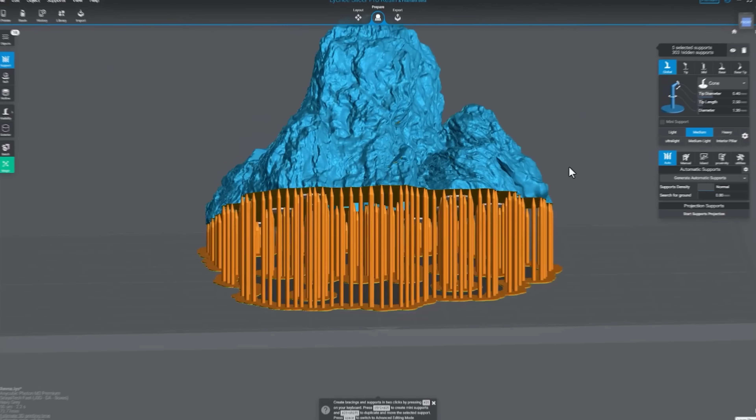Folks, imagine turning a simple idea into a fully 3D printable model without juggling apps, fixing messy geometry, or learning complex software. Sounds unreal, right? Today we're looking at a tool that actually makes this possible.

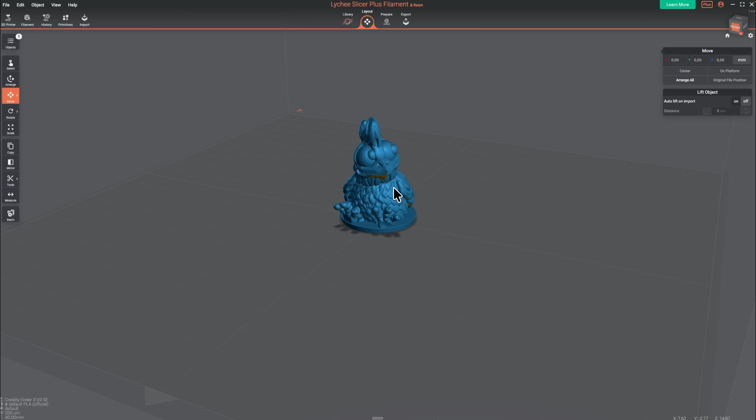And perhaps the biggest advantage is that everything happens inside the same ecosystem. You generate the figure, inspect it, and slice it directly in the Lychee environment. No exporting, no file conversion, no extra steps. For anyone who prints regularly, this alone is enough to speed up your workflow dramatically.

Alright folks, now that you know why this tool matters, let's walk through the full process together. Here we are inside the tool. On the main page, everything starts with the prompt field. This is where you describe the model you want to create.

Let's try generating a chess knight figurine standing on a base suitable for 3D printing. Before generating, we can choose a style. Lychee Gen already offers several presets, like Halloween base or tabletop no base, and more styles are on the way. If we try to create without picking one, the platform shows a warning recommending that we choose a style for better predictability and quality. But for this demo, let's continue without one.

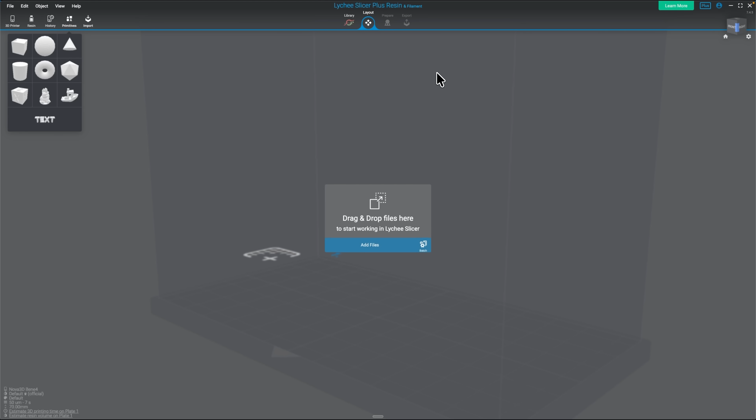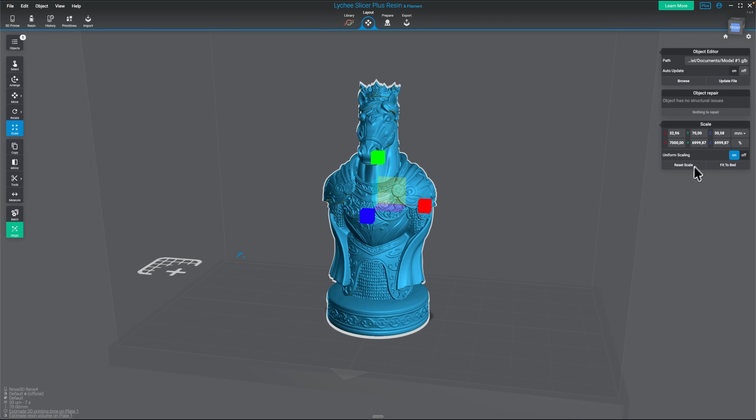Now let's move to slicing. In the same ecosystem, we click to open the Lychee slicer. The figure transfers automatically, we don't have to export anything manually. Inside the slicer, we can see the size, scale, and position of our figurine. On the left, we have tools to rotate, mirror, cut, or scale the model exactly the way we need. Our prototype is already positioned correctly, but if it weren't, we could rotate it just by dragging. And if we want it bigger or smaller, scaling reacts instantly.

Next, let's choose a printer. For this figure, I'll choose a Nova3D Bene4 with a resin setup that works really well for this kind of figurine and printing style. Here you can tweak the resin parameters, check the device history, or load additional objects if you need to.

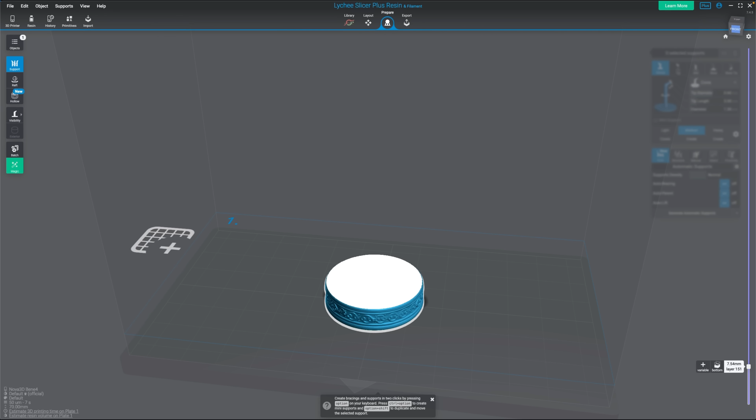Now we click Prepare. The slicer starts converting our 3D model into step-by-step instructions for the machine. Imagine slicing a loaf of bread, each slice represents one layer that the printer will build during the process. You can scroll through these layers using the slider to preview how the figure will take shape from the bottom to the top. And because the mesh is watertight, there are no gaps, artifacts, or weird empty pockets that would usually cause problems during printing.

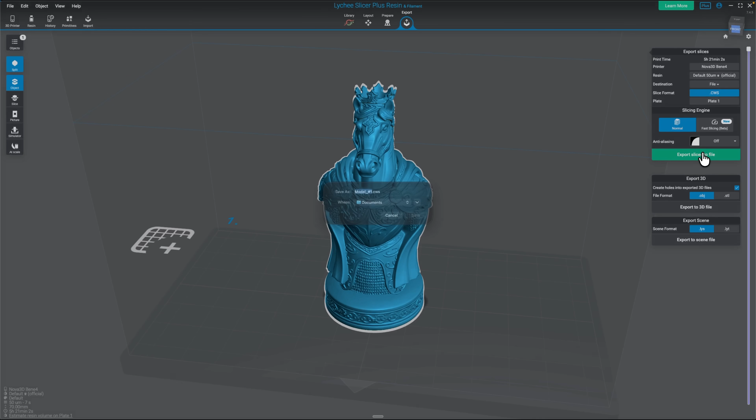After slicing, Lychee generates a print file, the language your hardware understands. It tells the machine where to move, how to build each layer, and which settings to use. From here, we just send the file to the printer and start the job.

And the new auto support system is honestly a huge step up. The supports are clean and smart, and they save you a ton of time compared to manual workflows. You spend less time tweaking supports and more time actually printing.

So you create your concept in Lychee, the tool takes care of the technical, print-ready side, and you focus on the artistic side of your work. That's exactly where this tool should be moving, handling the technical printing steps, so creators can stay in their creative flow.

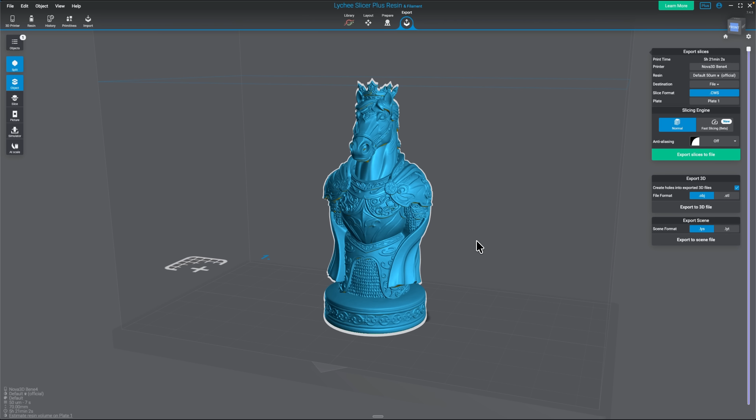Now, while we're here, let's talk about what makes this tool different from other AI 3D generators out there. A lot of AI systems can produce 3D objects, but most of them create meshes that are full of holes, overlapping geometry, or completely unusable artifacts. You often need Blender or Meshmixer to clean everything manually. Lychee Gen avoids all of that. The watertight topology alone sets it apart, because it means you can go straight to printing without suffering through cleanup.

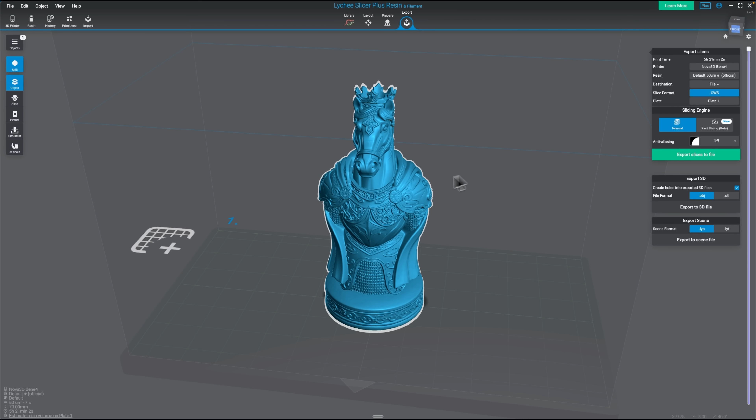Another major advantage is speed. While heavy prompts can take a bit longer, the results are consistent. You don't get wildly different shapes each time. And since the tool is integrated with the slicer, everything happens in one place.

On top of that, Lychee Gen uses a credit system with 4 different packs. So you just pick the option that fits how often you create, whether you're testing a few ideas a month or generating new models all the time.

Plus, the Lychee team is already working on updates that will allow artists and sculptors to use Lychee Gen like a true assistant. The AI will be able to generate the technical base, letting creators focus entirely on the artistic side of the sculpt. That's a huge shift. It means you can experiment faster, prototype designs, and bring ideas to life without wrestling with tools that slow you down.

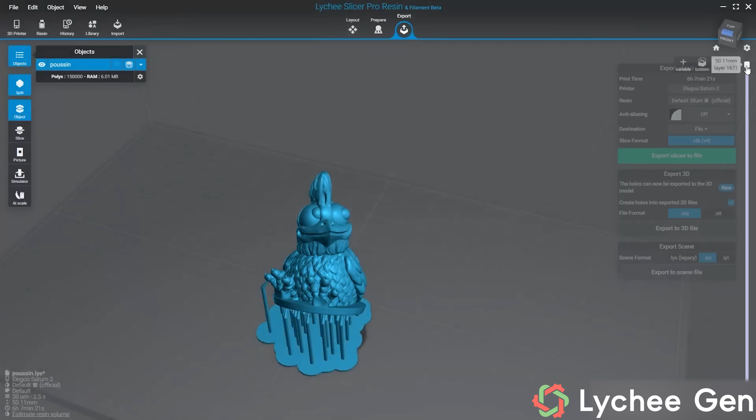Alright, let's wrap this up. Lychee Gen isn't just another AI toy, it's a practical tool that genuinely changes the workflow for 3D creators. Whether you're printing miniatures or simply exploring the world of modeling, this platform gives you the power to go from idea to print in minutes. The fact that everything stays inside a single ecosystem makes the whole process smoother, faster, and honestly more enjoyable. And with more updates already on the way, the potential here is only growing.